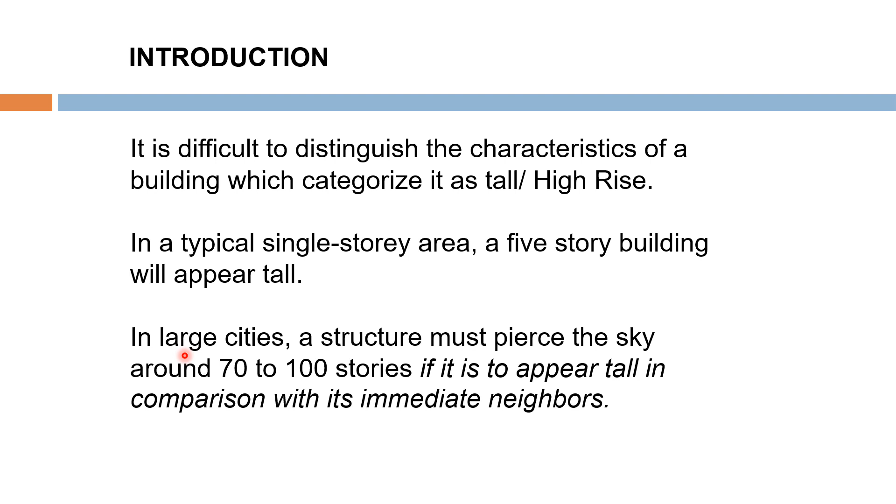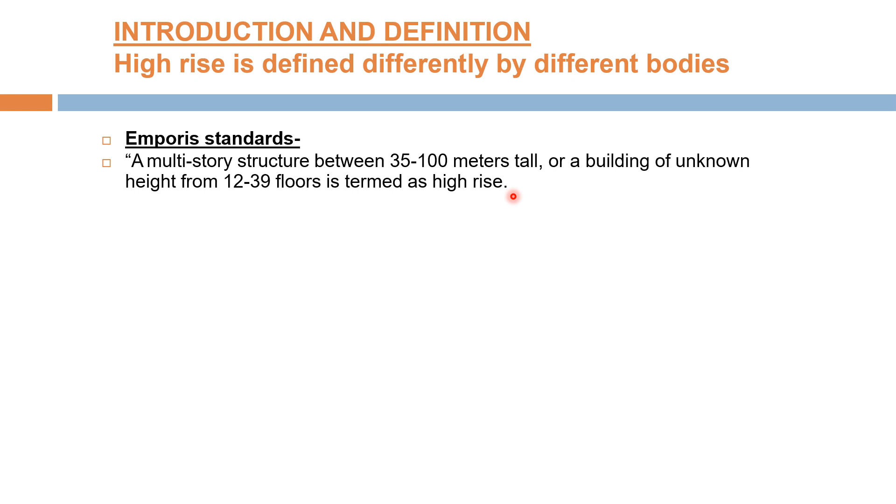Now, introduction and definition of high-rise building as defined by different bodies. First, Emporis standards, made from gathering information. According to Emporis standards, a multi-story structure between 35 to 100 meters tall, or a building of unknown height from 12 to 39 floors, is termed a high-rise building. That is the Emporis standard.

The International Conference on Fire Safety. What's the criteria for high-rise here? Any structure where the height can have a serious impact on evacuation. In any case of fire, there will be a serious impact on evacuation in a high-rise building. So where that issue is very high or serious, that is the high-rise.

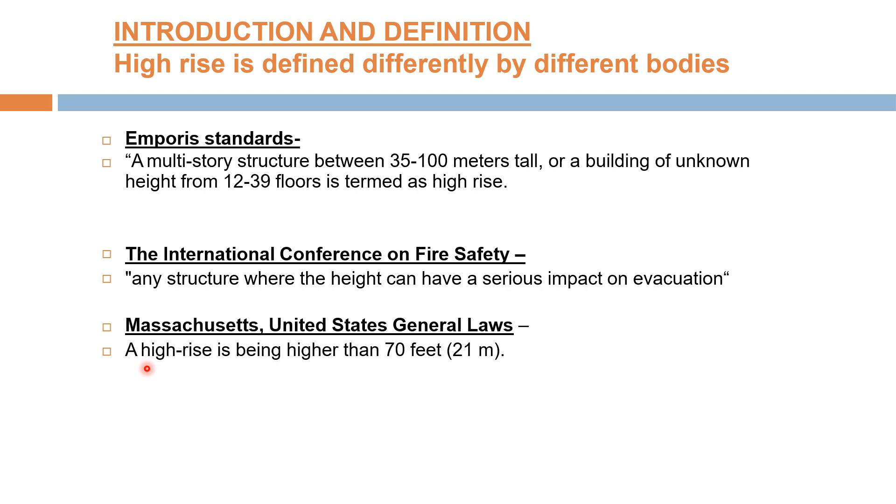Third, Massachusetts, United States General Laws: a high-rise is defined as being higher than 70 feet or 21 meters.

Buildings higher than 100 meters are termed skyscrapers. According to Emporis, buildings 300 meters or higher are termed supertall, and buildings 600 meters or taller are termed megatall. Now for this course, we have to set some guidelines.

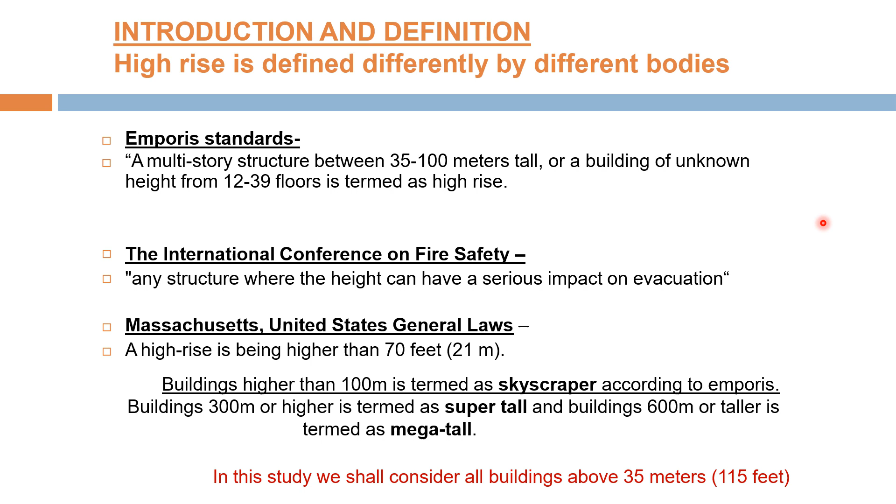In this study, we shall consider all buildings above 35 meters as called high-rise or tall buildings.

Demand for high-rise buildings. Why is there a need for high-rise building construction? High-rise buildings are becoming more prominent these days due to several reasons. First, and the major issue, is scarcity of land. There is a shortage of land. In urban areas, there is already too much development of industry, residential areas, and for business purposes like offices, so high-rise is a very good option.

Increasing demand for business and residential space. Even residential space is very limited, so we can accommodate hundreds, even thousands of people, in a high-rise building. That is also a demand driver for high-rise buildings.

Economic growth is also now a symbol: any city with a good rate of economic growth has many more high-rise buildings, depending upon their businesses, offices, criteria, etc.

Technological advancements are again a very important parameter regarding structural systems. Before the 1930s, there was very little advancement in high-rise buildings, in calculation systems or machinery, etc. There was very little advancement. So at that time there was difficulty, but today it is much easier. That is the technology demand for high-rise buildings.

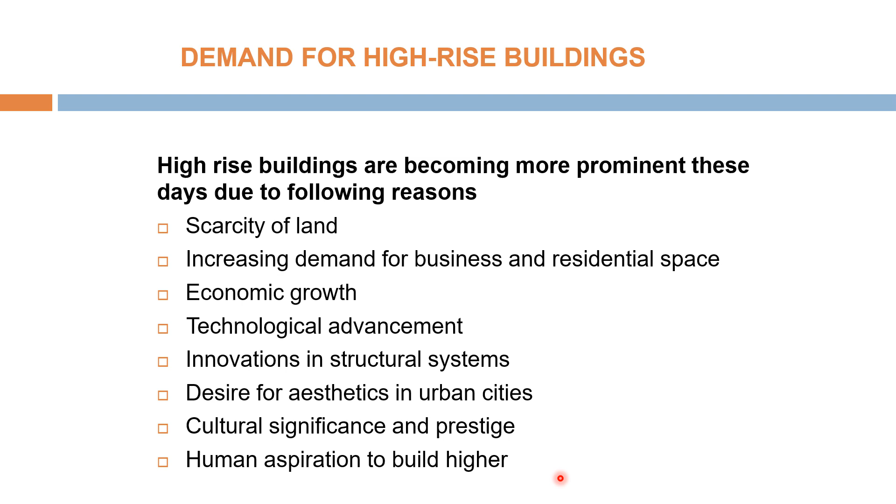Dr. Fazlur Rahman Khan, structural engineer, has been called the Einstein of structural engineering. Whenever you open any book on high-rise buildings, you will definitely find the name of Dr. Fazlur Rahman Khan, structural engineer and the greatest structural engineer of the 20th century, for his innovative use of structural systems that remain fundamental to modern skyscraper design and construction.

His innovations: tube structural system, frame tube, truss tube and X bracing, bundled tube, tube in tube, outrigger and belt truss, concrete tube structures, and shear wall frame interaction system. These are the innovations of Dr. Fazlur Rahman Khan, structural engineer.

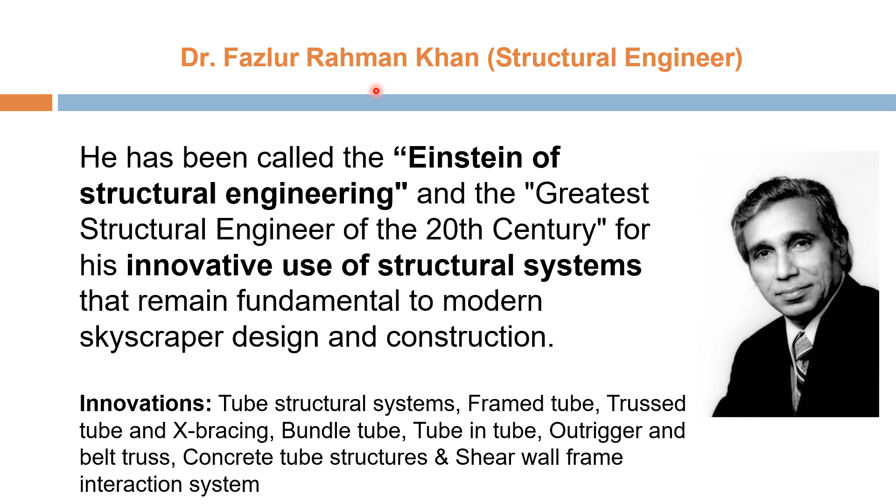Development of structural systems: first generation of buildings, 1780s to 1850. The exterior walls of these buildings consisted of stone or brick, although sometimes cast iron was added for decorative purposes. Here is the Home Insurance Building, a first generation building in the United States. The columns were constructed of cast iron, often unprotected; steel and wrought iron was used for the beams, while floors were made of wood. That is the first generation of high-rise buildings.

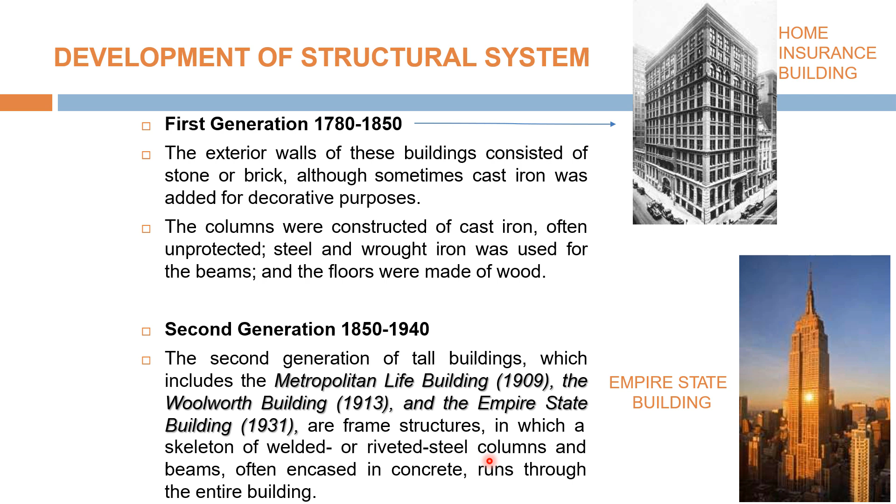Second generation, 1850s to 1940s, includes the Metropolitan Life Building 1909, the Woolworth Building 1913, and the Empire State Building 1931. These are frame structures in which a skeleton of welded or riveted steel columns and beams, often encased in concrete, runs through the entire building.

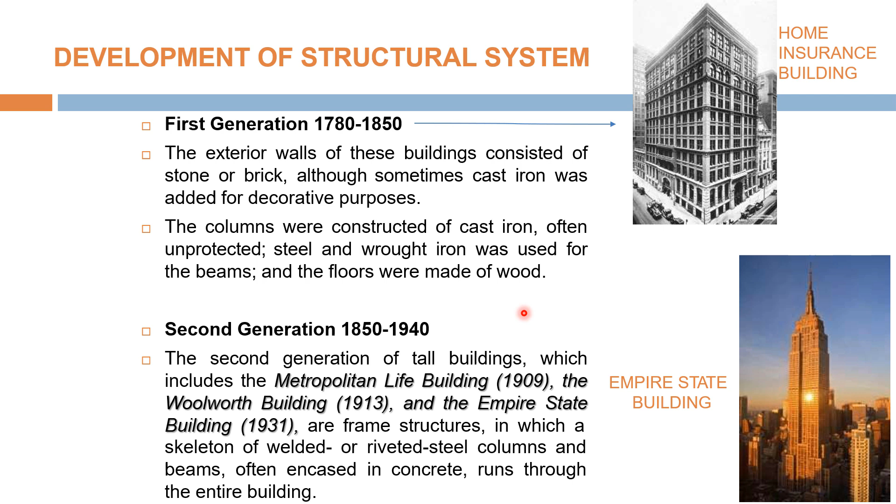Third generation buildings, 1940s to present. Buildings constructed after World War II until today make up the most recent generation of high-rise buildings. Within this generation there are steel frame construction, that is core construction and tube construction, reinforced concrete construction, shear wall construction, and steel frame reinforced concrete construction. These types of structures are made in the third generation.

Hybrid systems also evolved during this time. These systems make use of more than one type of structural system in a building. So in the third generation, not only one type of system is used, but hybrid systems are also used, which is the combination of two or more structural systems.

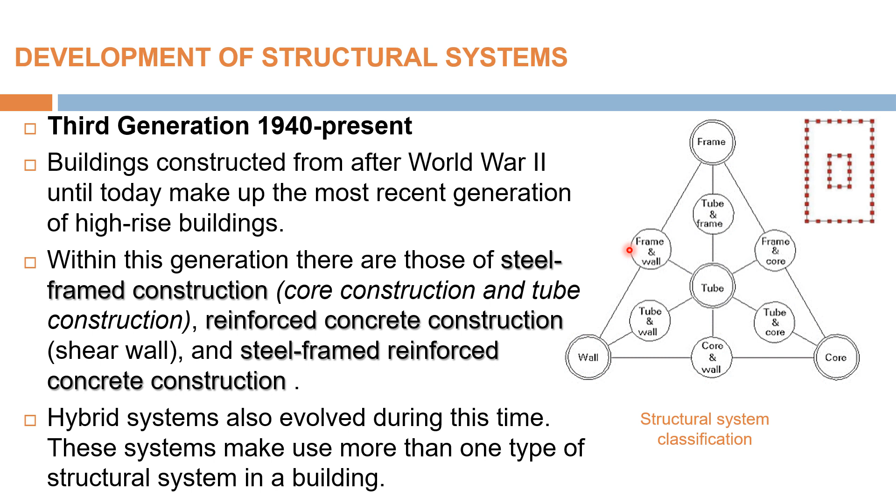Now frame and tube can be combined and used together. Similarly, wall and frame, tube and wall, tube, core and wall, tube and core. These are the basic structural systems, but we can combine frames, walls, and core all in one structure.

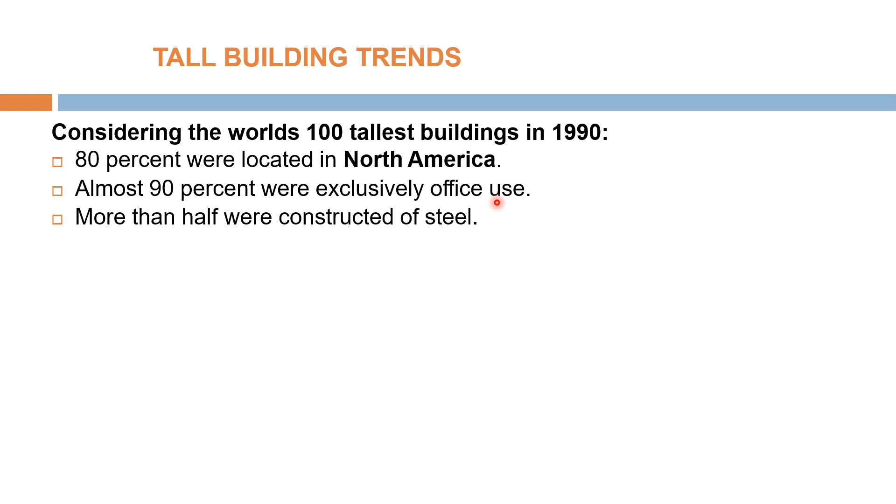Tall building trends. Considering the world's 100 tallest buildings in 1990, 80% were located in North America. Almost 90% were exclusively office use. More than half were constructed of steel.

In 2013, for the world's 100 tallest buildings, the largest share, 43%, are now in Asia. Only one new 200-meter-plus building was built in North America in 2013, compared to 54 in Asia. Less than 50% are exclusively office use. Almost a quarter are mixed use, and 14% are residential. Almost half were constructed of reinforced concrete and only 14% are of steel.

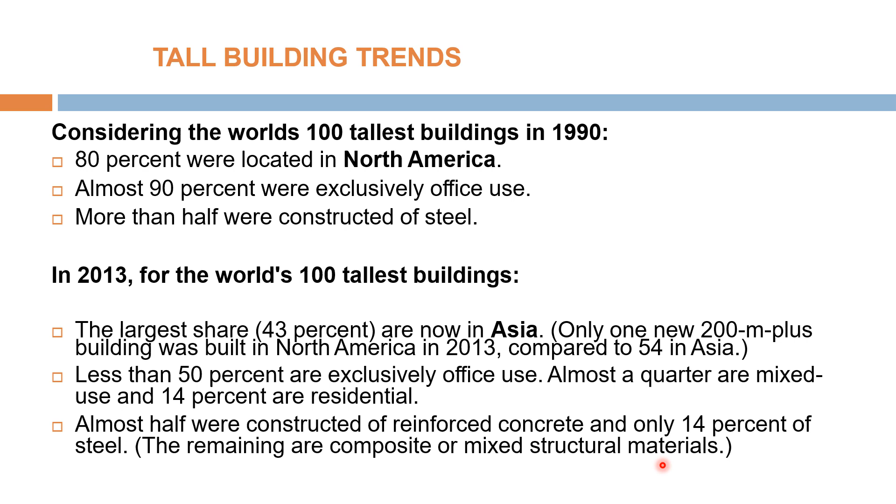The remaining are composite or mixed structural materials. Composite means steel sections are embedded in concrete, forming composite members. Mixed structural material means different types of structural materials are used in the construction of high-rise buildings.

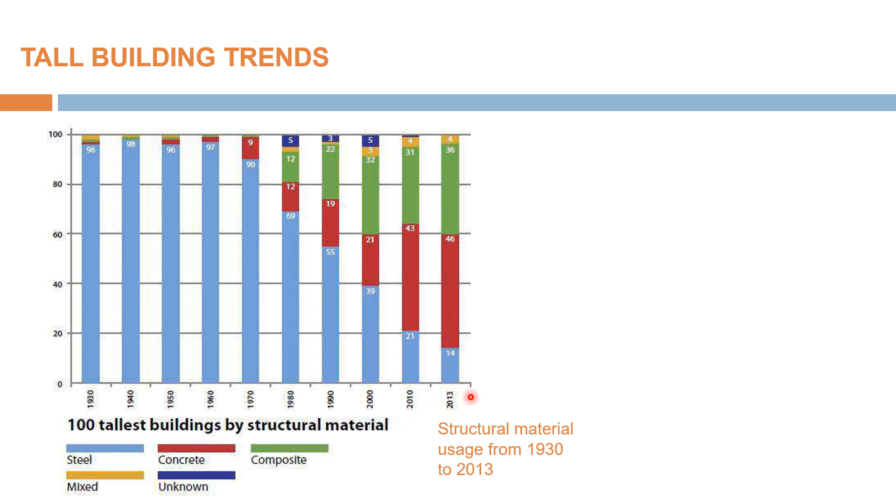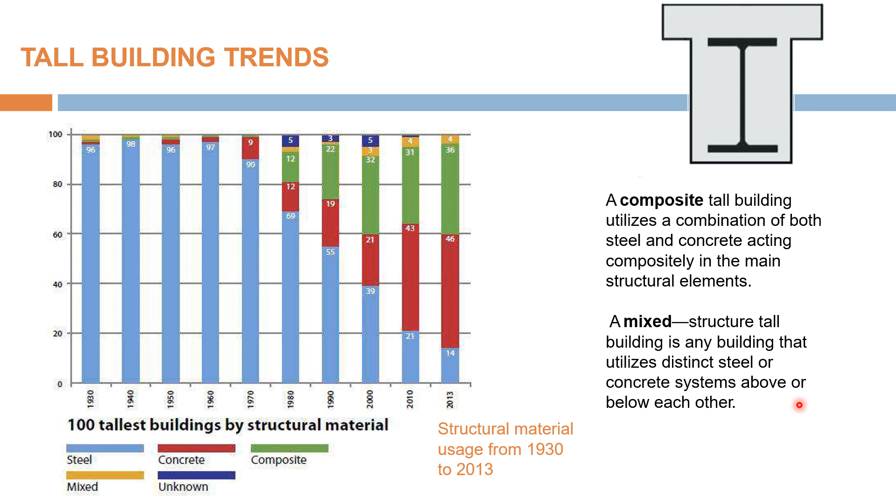A mixed structure tall building is any building that utilizes distinct steel or concrete systems above or below each other. That is mixed, where we use different types of materials.

The structure has to carry the vertical gravity loads and lateral wind and earthquake loads. This means the high-rise building should have the capacity to resist vertical loads, such as the self weight of members, partition loads, human loads, and all other types of vertical loads. Second, there are lateral loads, of which there are two: wind and earthquake.

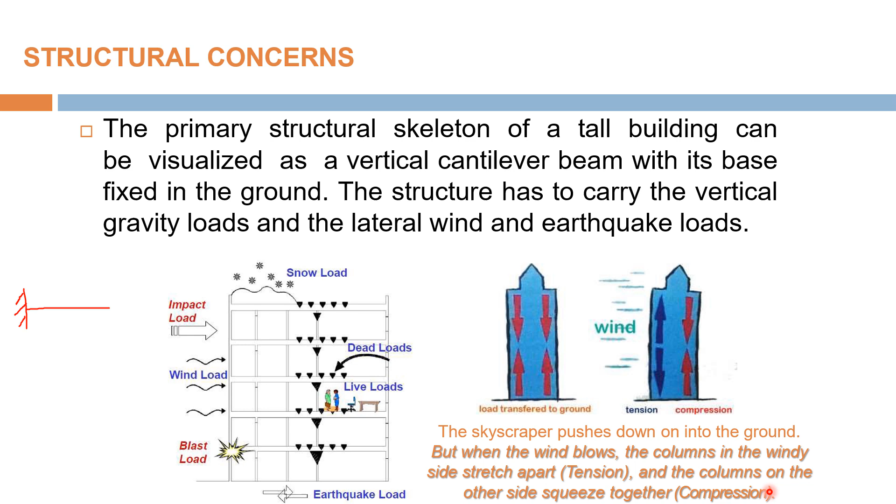Fighting gravity: the weight of the building is supported by a group of vertical columns. Each floor is supported by horizontal steel or concrete girders running between the vertical columns.

Either the vertical members may be of steel or concrete. Curtain walls made of steel and concrete attach to the outside, covering the building. These walls are also either steel or concrete.

Wind resistance: buildings taller than 10 stories would generally require additional steel for the lateral system. Means in high-rise buildings, when the number of stories is more than 10, there will be more requirement of additional steel due to lateral loads of wind.

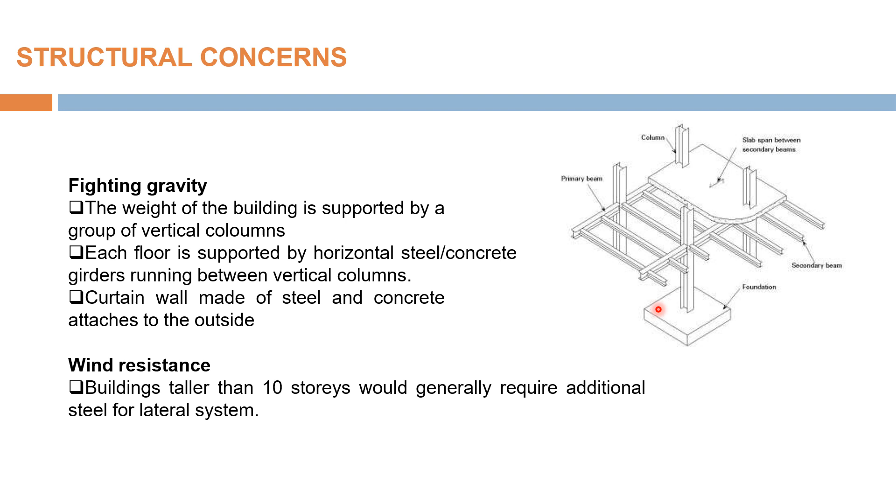In structural concern, there is also wind tunnel testing for buildings. For taller skyscrapers, engineers have to construct especially strong cores through the center of the building for wind resistance.

As the building becomes taller, sway due to lateral forces becomes critical, placing greater demand on the girders and columns that make up the rigid frame system to carry lateral loads. Means when buildings go higher and higher, there comes a duty on the girders and columns to resist the lateral loads.

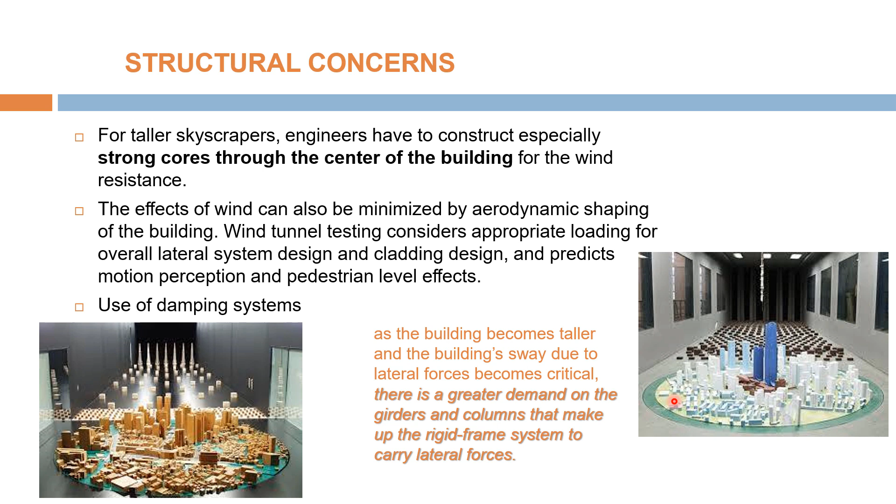Classification of tall buildings: structural system. In terms of structural system, buildings can be classified based on the structural material used, such as concrete or steel. Structural systems of tall buildings can also be divided into two broad categories: interior structures and exterior structures.

This classification is based on the distribution of components of the primary lateral load resisting system over the building. Means columns are present on the outer side or the inner side, or concrete walls are present on the inner side or the outer side. This classification is based on where the load resisting elements are present.

A system is categorized as an interior structure when the major part of the lateral load resisting system is located within the interior of the building, meaning the major load resisting elements are present at the interior of the structure.

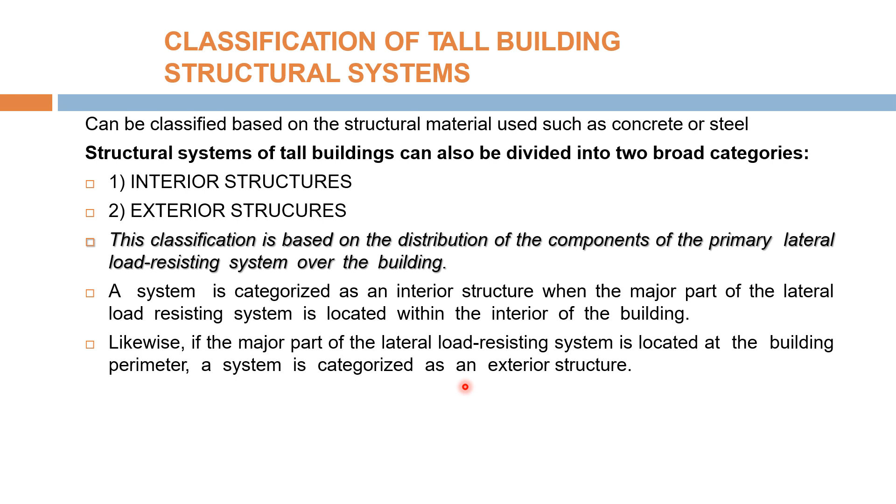Similarly, if the major part of the lateral load resisting system is located at the building perimeter, a system is categorized as an exterior structure.

It should be noted, however, that any interior structure is likely to have some minor components of the lateral load resisting system at the building perimeter. Means a system that is primarily interior may still have some slight components on the perimeter, so it doesn't mean one is purely interior or purely exterior. It can be mixed, and any exterior structure may have some minor components within the interior of the building.

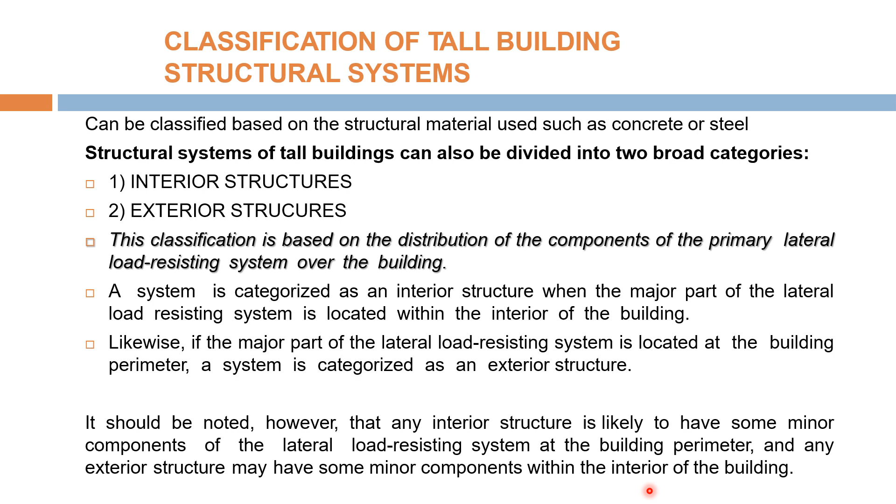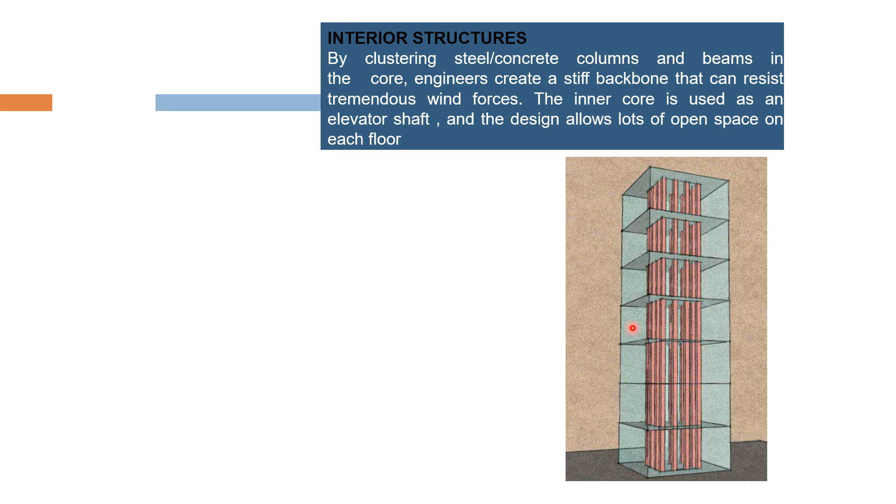Interior structures: by clustering steel or concrete columns, or even concrete walls, lift wells and beams in the core, engineers can create a stiff backbone that can resist tremendous wind forces. You can see the major part of the structural system is at the center of the building. The inner core is used as an elevator shaft, and the design allows lots of open space on each floor. You can see that these are the interior structures.

Now, exterior structures: in newer skyscrapers like the Sears Tower in Chicago, engineers move the columns and beams from the core to the perimeter, creating a hollow, rigid tube as strong as the core design but weighing much less. That is the second technique of structural system, the exterior structures.

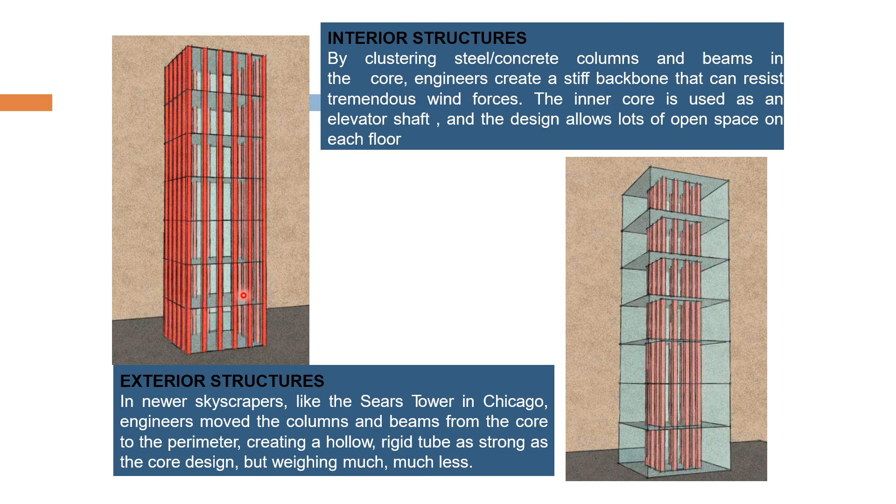Now, first of all, interior structure system types. First one, that is a basic type, rigid frame beam column system.

A rigid frame in structural engineering is the load resisting skeleton constructed with straight or curved members interconnected by mostly rigid connections which resist movements induced at joints of members. Its members can take bending moment, shear and axial.

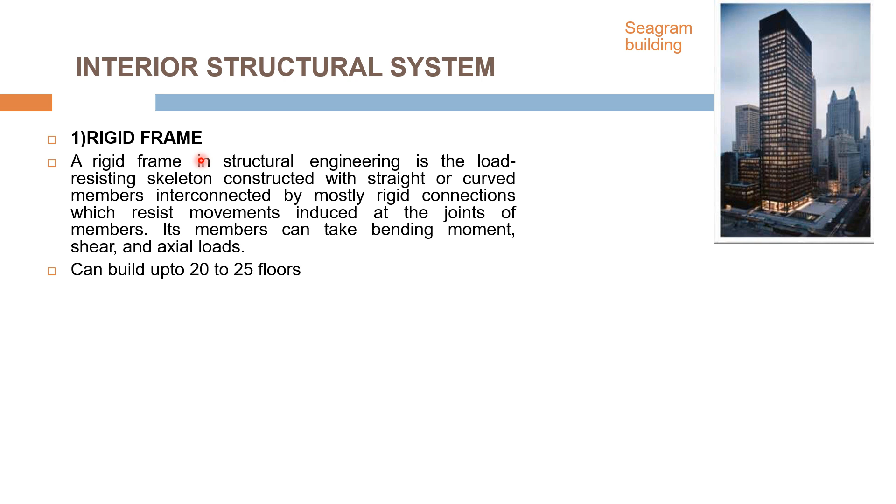Can build up to 20 to 25 floors. That is the basic type most commonly used in high-rise construction, where tall buildings are constructed. This is the basic combination of beams and columns, that is the rigid frame.

Second type of interior, that is shear wall structure. Concrete continuous vertical walls from the bottom to the top. Here, in the center of the building, concrete walls may serve both architectural partitions and structurally to carry the gravity and lateral loading. This can serve two purposes.

One, for the architecture, you can place the glass on one side for the aesthetic purpose, on the lift well or the lift walls. Second, these concrete walls can take the major part of the load by itself. Very high in-plane stiffness means rigidity, and strength make them ideally suited for bracing tall buildings.

Usually built as the core of the building, these act as the core or the backbone of the building. Can build up to 35 floors with shear wall structures. Why shear wall named? When horizontal forces strike the building, the horizontal or lateral loads act as a shear force. So that's why these walls are called shear wall structures.

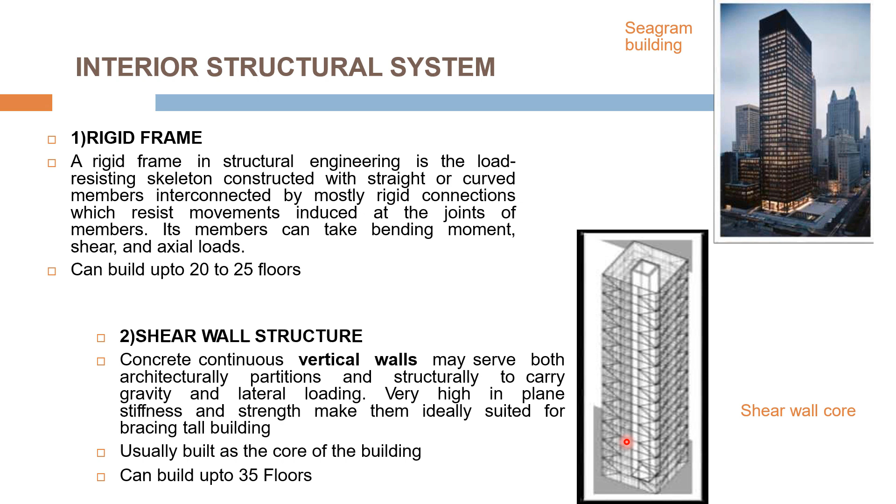Outrigger structures, that is again a type of interior structures. The core may be centrally located with the outriggers. What is an outrigger? I will show. The core, the central part, that is the core of the structure, located with outriggers extending on both sides.

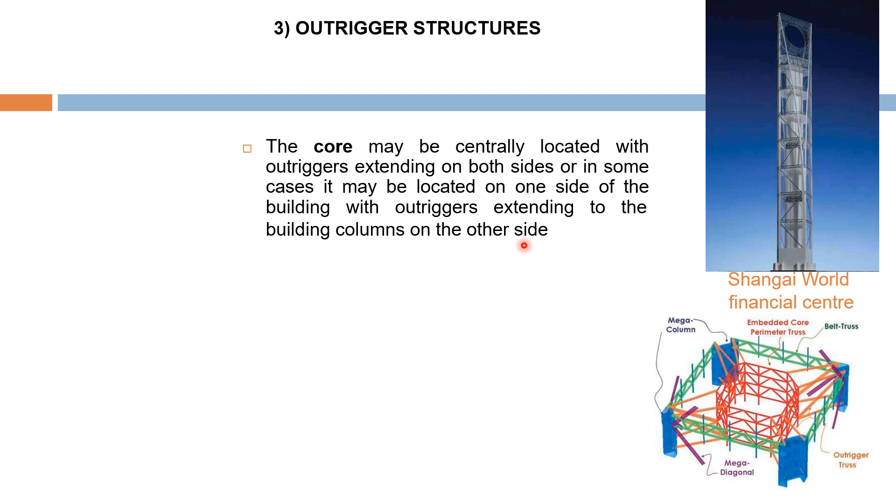You can see on the perimeter there are truss elements. In some cases it may be located on one side of the building with outriggers extending to the building columns on the other side. Here is a more good demonstration.

The outriggers are generally in the form of trusses. You can see at a number of floors, for example at 30 floors or even again after 30 floors, a horizontal belt is provided, belt trusses as vertical virtual outriggers.

Even these trusses can go between 1 to 2 stories, can take up to 1 to 2 stories, in steel structures, or walls in concrete structures, that effectively act as stiff headers, inducing a tension compression couple in the outer columns. Belt trusses are often provided to distribute these tensile and compressive forces to a large number of exterior frame columns.

Means these belt trusses are provided to act as a tension and compression element and to transfer these forces to the outer elements of the frame.

Here is a plan view. That is a braced core shear wall at the center. At the outside, belt trusses are provided, and the main resisting element is the inner core.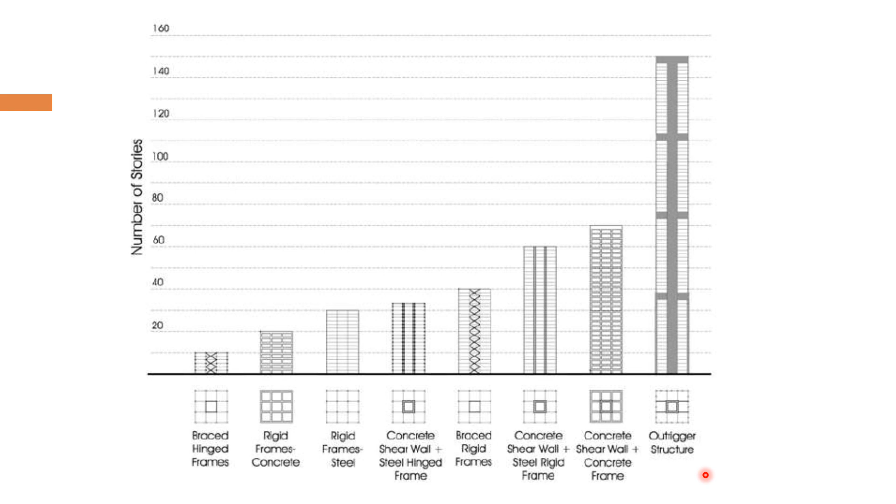The second type of overall structural system, that was exterior structures. The first one is the tube system. The tube system concept is based on the idea that a building can be designed to resist lateral loads by designing it as a hollow cantilever perpendicular to the ground. This type of structure may be hollow from the center.

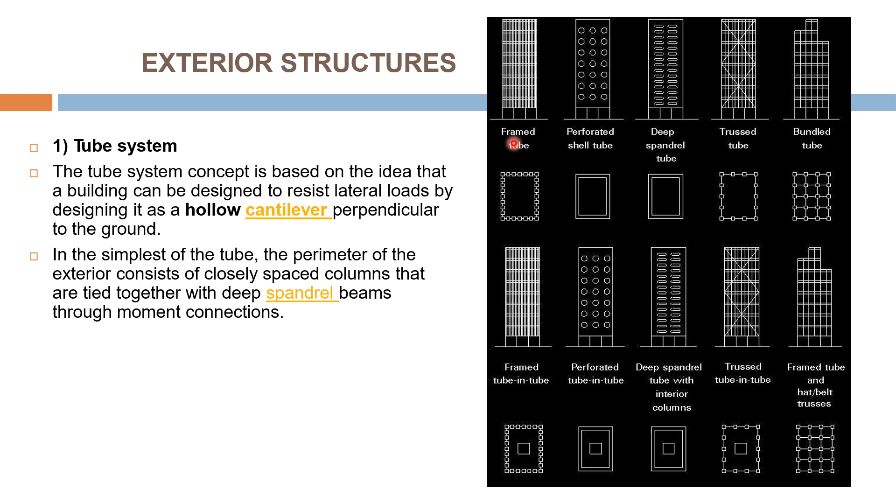In the simplest of tube, the perimeter of exterior consists of closely spaced columns that are tied together with deep spandrel beams through moment connections. Here is an example of frame tube. In this high-rise building, the columns are closely spaced at the outside and the interior space is left empty. That is the type of tube system.

Here, perforated shell tube means holes are left in the concrete walls. The concrete walls are present on the perimeter of the high-rise building, with deep spandrel beams and less openings.

Truss tube: all the columns are present at the perimeter, but these are also diagonally braced. That is truss tube.

Bundle tube: now columns are made in such a way that there are a number of tubes within the tube, exterior tube, then interior tubes, so that is bundle tube. Frame tube in tube: at the exterior there are a number of columns, and at the interior some other arrangement of columns or maybe a concrete wall, then this type of structure is tube in tube.

Perforated tube in tube: just introduce a tube also at the inside. All the types are the same.

This assembly of columns and beams forms a rigid frame that amounts to a dense and strong structural wall along the exterior of the building. That benefits the stiffness and rigidity on the exterior of the building and acts as a hollow tube.

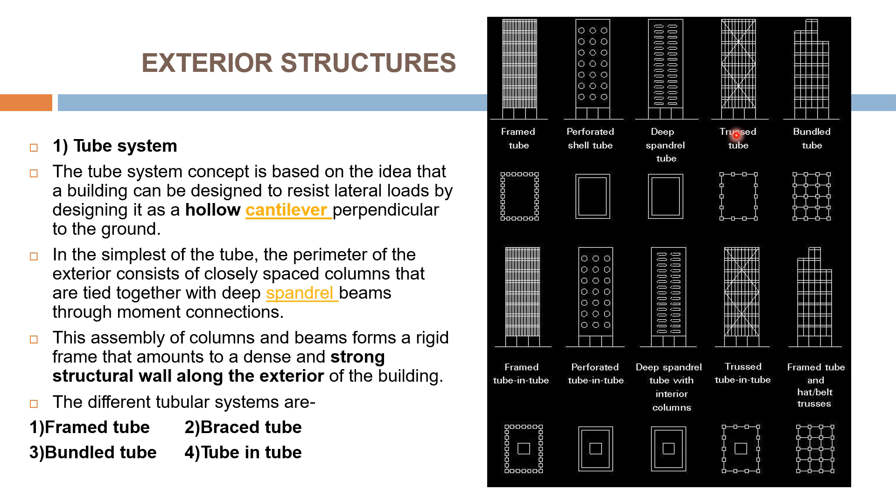The different tubular systems are frame tube, brace tube, bundle tube, and tube in tube. The truss tube is also the brace tube. All types are discussed already.

Early designs of tall buildings recognized the effectiveness of diagonal bracing members in resisting lateral forces. These diagonal members give good aesthetic as well as structural sense, but the difficult part of this type of construction is the joints. Their joints should be made with the proper structural sense.

With the moment connection, all types of these are more important in this Diagrid system. Most of the structural systems deployed for early tall buildings were steel frame with diagonal bracing of various configurations such as X, or sometimes with K and chevron.

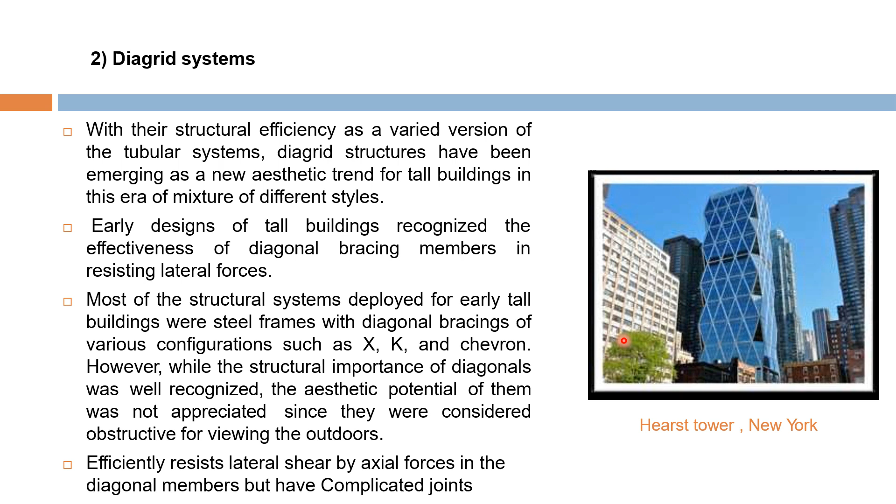They efficiently resist lateral shear by axial forces in the diagonal members but have complicated joints. Third one is the space truss - the truss which is in the 3D plane.

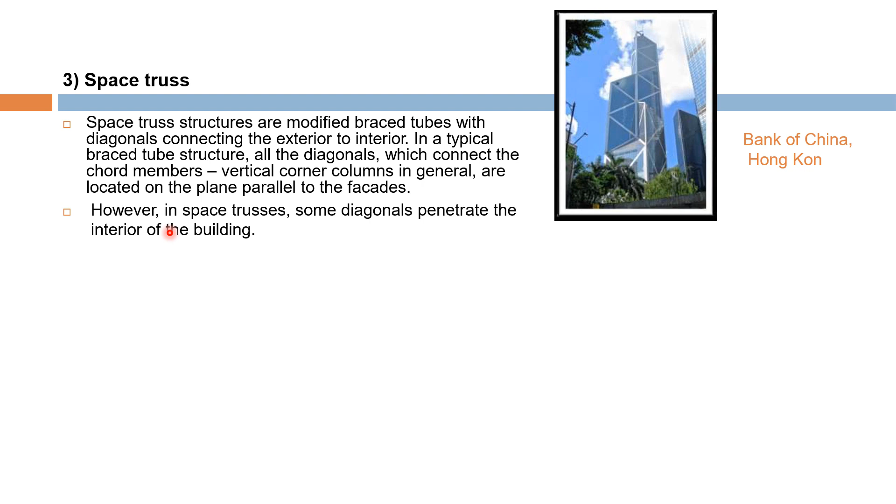However, in space trusses, some diagonals penetrate the interior of the building, that forms the space truss.

Exoskeleton structure: in exoskeleton structure, lateral load resisting systems are placed outside the building lines away from the facades. Now the facade may be of glass system present on the inside, and all the structural systems are present on the outside, away from the facade.

Due to the system's compositional characteristics, it acts primarily as a building identifier, one of the major roles of building facades in general cases. Fireproofing of the system is not a serious issue due to its location outside the building line - that is the benefit of exoskeleton structure. These types of structures can be used where there is an issue of fire.

That is the Hotel de las Atres, and in the Space Truss category, that's the Bank of China, Hong Kong.

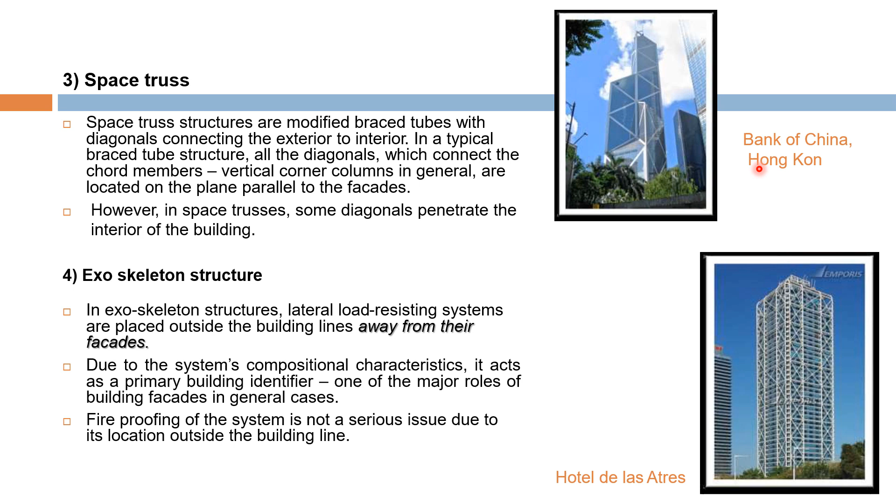Super frame structures. Super frame structures can create ultra high rise buildings up to 160 floors - that is a very big achievement in super frame structures. Super frames or mega frames assume the form of a portal which is provided on the exterior of the building.

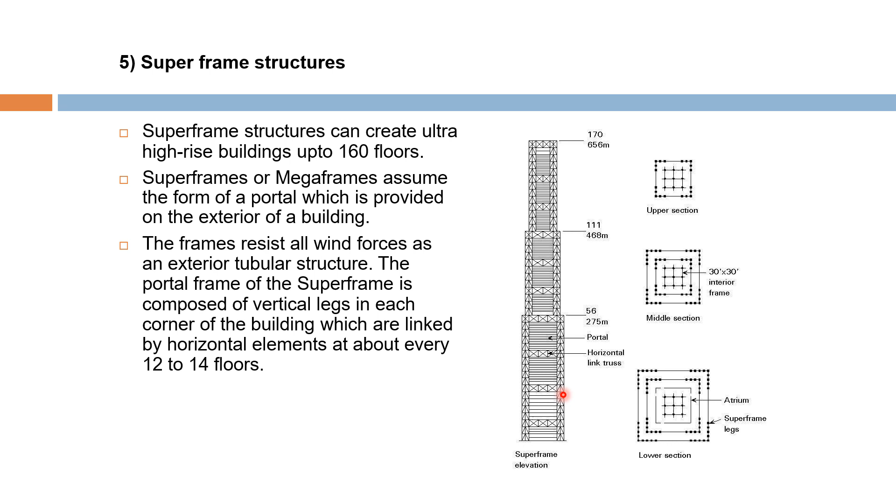The portal frame of the super frame is composed of vertical legs in each corner of the building, which are linked by horizontal elements at every 12 to 14 stories. Here you can see 12 to 14 stories linked with horizontal members, either with truss or concrete walls.

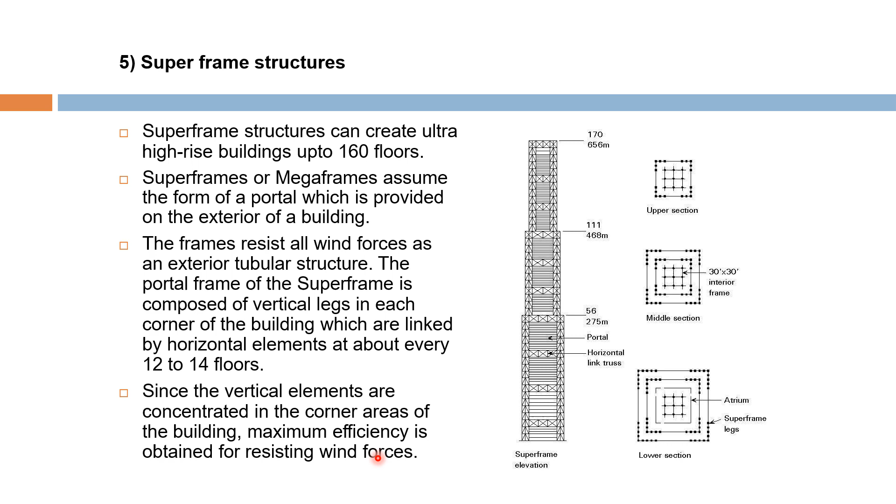Since the vertical elements are concentrated in the corner areas of the building, maximum efficiency is achieved or obtained for resisting wind forces.

Now the high-rise building case study: case study of PETRONAS Tower in Malaysia. PETRONAS Tower is a symbol of national pride and shows the nation's achievement in the world economy and technologies.

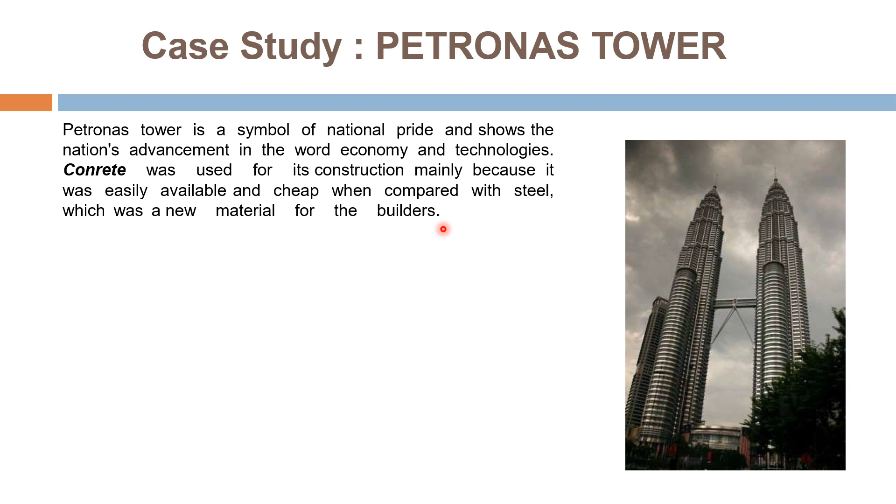Concrete was used for its construction mainly because it was easily available and cheap compared with steel, which was a new material for the builders. That is why concrete was used at the time of construction of Petronas Tower.

The architect successfully incorporated Malaysian and Islamic motifs in the design. The sky bridge was an important feature of the design, which was implemented later. First, these towers are made, then the connecting bridge is made later - that is the sky bridge. Petronas Tower has a tube-in-tube structural system.

The structural members are made with high strength concrete which was cast inside, meaning construction is concrete made and cast on site. The perimeter columns are held together with the help of ring beams, which are the circular outer beams. The internal core structure is made of concrete shear walls.

The building didn't require an extra damping system because the heavy structural members were made of concrete, even though no new advancement in technology was made during this project. All the available material and technology going in the trend was used smartly.

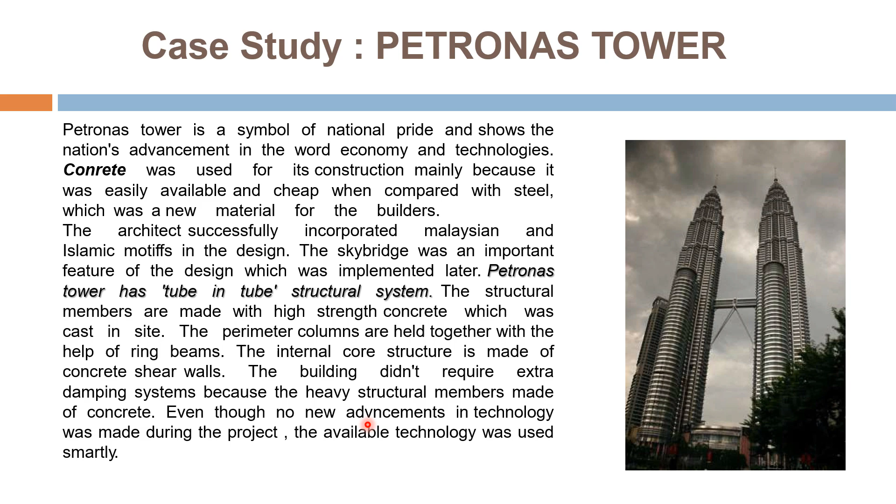The Petronas Tower height above the ground is 452 meters, and in the ground it is 105, or roughly 120 meters deep by adding that. Then the pile foundation is used in the Petronas Tower.

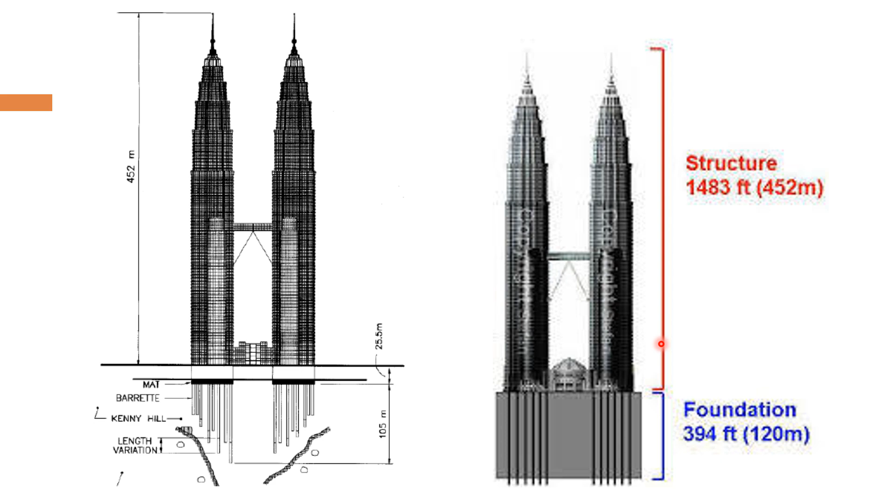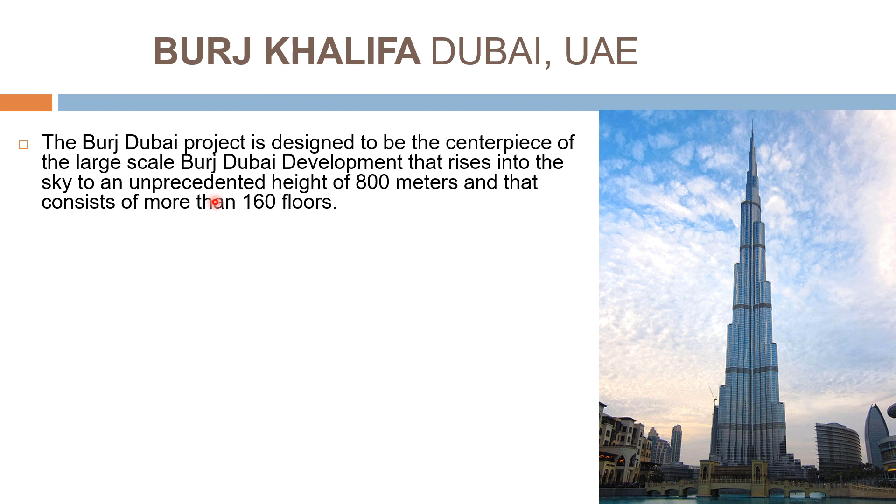Burj Khalifa, Dubai, UAE. Here a new structural system is used that was never used before. The Burj Dubai project is designed to be the centerpiece of a large-scale Burj Dubai development that rises into the sky to an unprecedented height of 800 meters, consisting of more than 160 floors.

The decision to build Burj Khalifa is reported based on the government's decision to diversify from an oil-based economy to one that is service and tourism based. Unlike many super high-rise buildings with deep floor plates, the government's decision was that oil is going to run out in this country, so they decided to make a tourism impact by building large buildings.

The Y-shaped floor plans of Burj Dubai maximize views and provide tenants with plenty of natural light. I will show in the next slide the plan view that is Y-shaped. According to officials, it is necessary for projects like Burj Khalifa to be built in the city to garner more international recognition and hence investment.

The structural system for Burj Khalifa was a new system developed for the building, called the buttressed core. In this system, the lateral loads and gravity loads are shared equally between the interior core and the perimeter, meaning interior and exterior. Both systems are combined in this technique, linked by link beams, which makes the structure super strong.

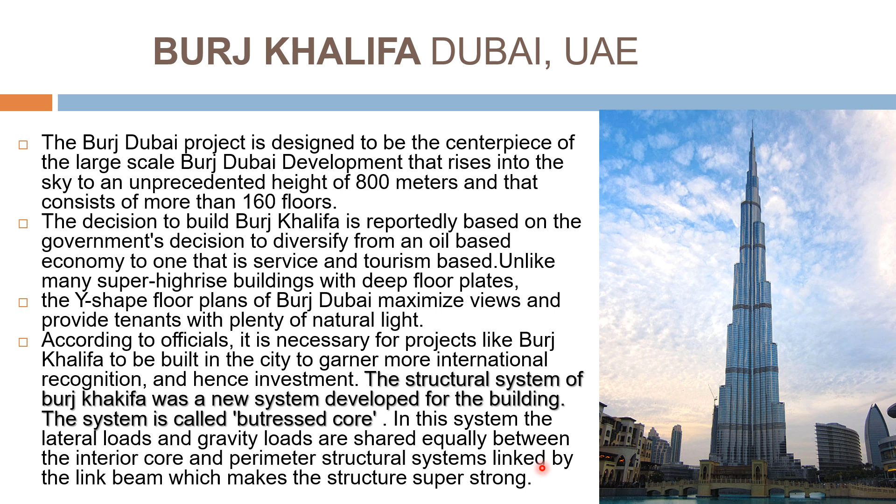Here is the Y shape of the Burj Khalifa. The central core is also connected with the exterior by concrete walls via link beams. The image shows the structural system employed in the building - the blue members are the load carrying elements, the carrying concrete wall system. All the wall structures are linked to the core with the help of link beams.

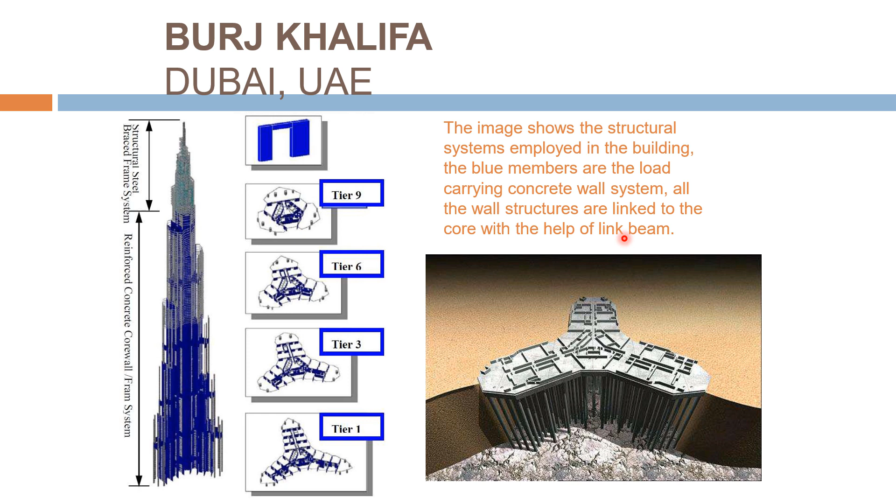The future of tall buildings - nothing could be more stunning than the latest generation of skyscrapers. People are attracted to these, known as super talls. A tower has to be over 300 meters high to qualify as super tall, but there is no shortage of contenders. At nearly 830 meters high, the Burj Khalifa in Dubai is undeniably the world's tallest building, but it won't be for very long as the race to build upwards continues around the world.

For example, Dubai - this is the largest building, impacting the world in books, literature, and libraries. This era will be written about as the era of the tallest building, the Burj Khalifa.

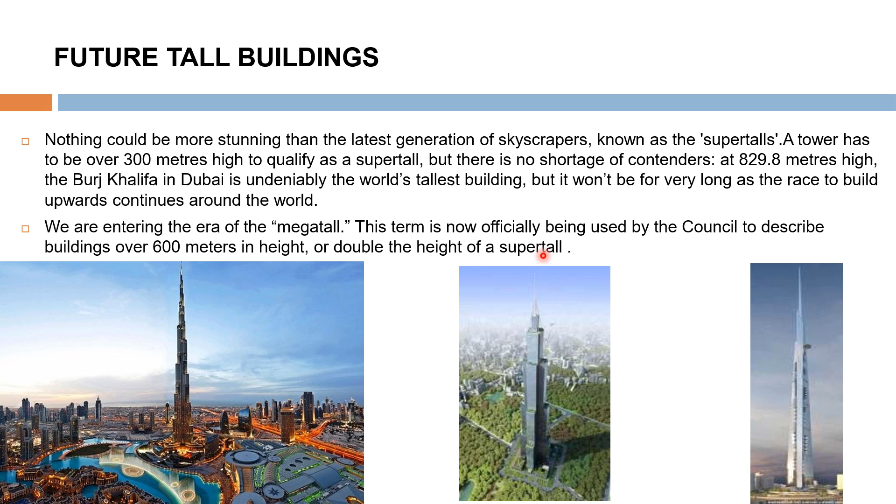We are entering the era of megatall. The term is now officially being used by the council to describe buildings over 600 meters in height, or double the height of a super tall. That is a megatall - 2 times super tall.

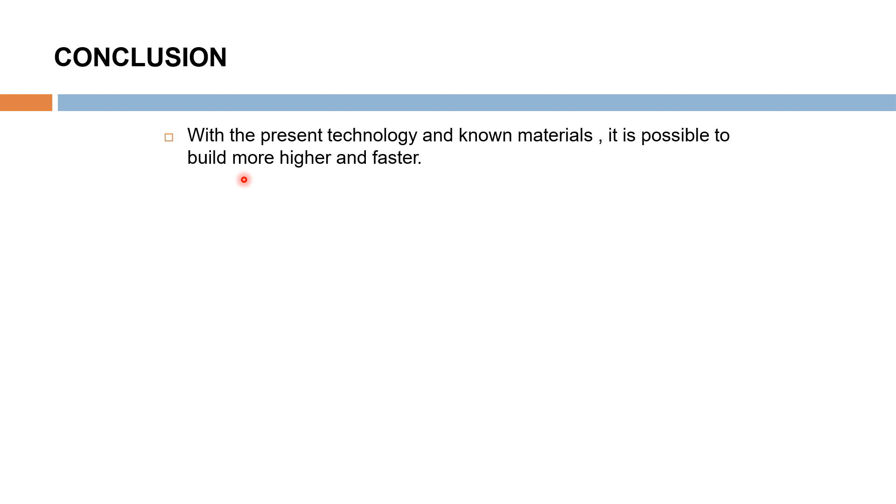Conclusion: with the present technology and known materials, it is possible to build more, higher and faster. It is now possible to build skyscrapers using prefabricated beams, columns, and slabs - all things prefabricated - and in very little time skyscrapers can be built.

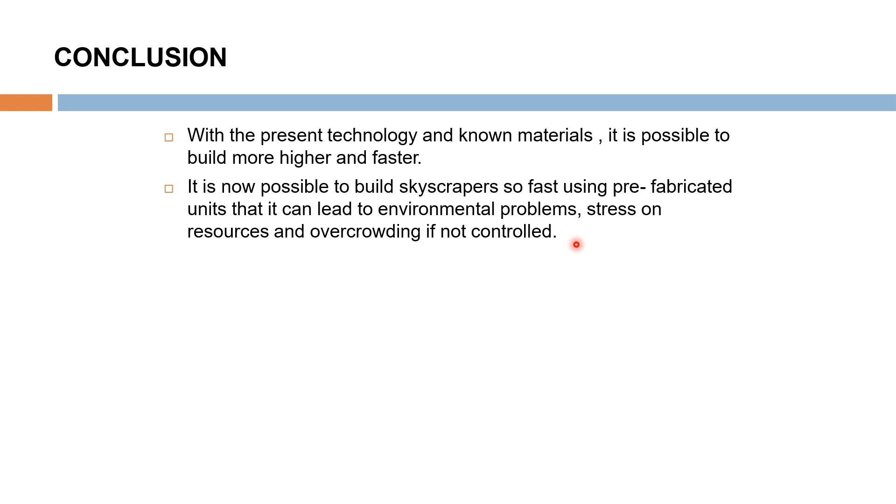To build higher, the base of the building will have to be made wider. The bundle tube system was a great innovation and was able to span great heights during its time. To attain the height of Burj Khalifa, the bundle tube system would need a bigger base when compared with the buttress core system.

New improved structural systems and new materials in the future can lead us to even greater heights and more stable high-rise buildings. It's not technology holding buildings back - it's the money.